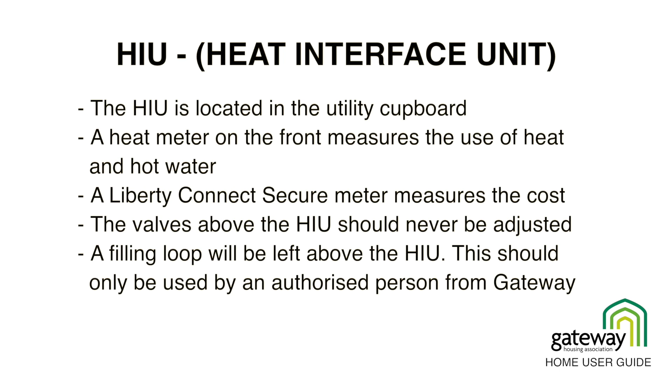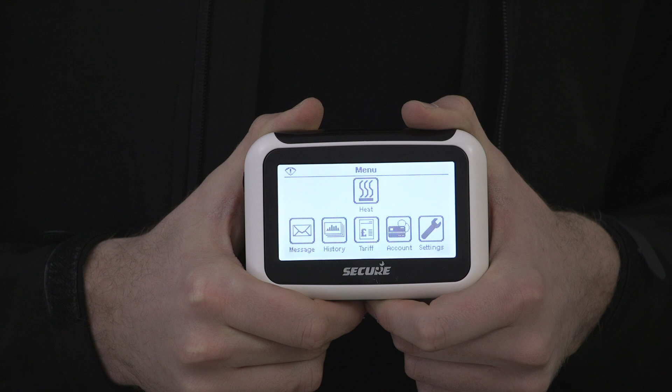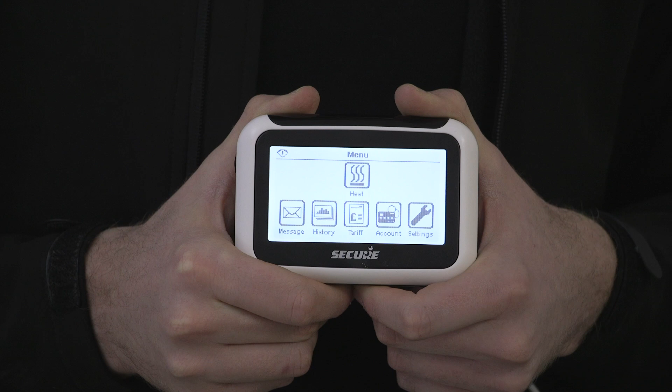This is your wireless heat meter, which is connected wirelessly to the heat meter within your cupboard. This is used to see how much hot water and how much heating you're using within your plot. Within this smart meter you can see your usage per month, and you can even see your previous history on months. This also shows your tariff and payments, and you can compare it to other months previously.

Usually you will not need to use this, it'll just be sitting on your worktop. There's more if you are interested to see your usage. For more information, please contact Gateway or see your home user guide.

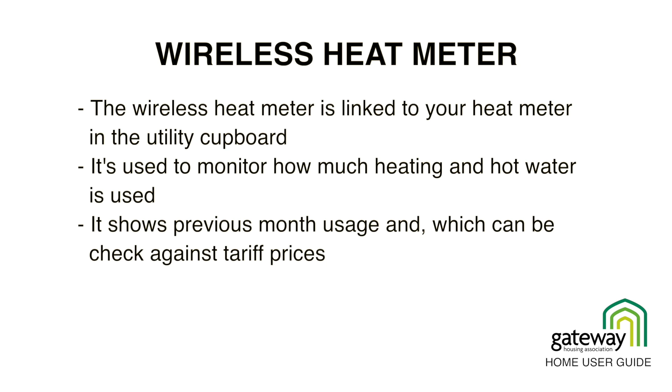Within the hallway there is also a programmer located, as shown here. This programmer is what the resident will use to turn on and off the heating within the plot. During commissioning, before handover, we've already set up the heating to be switched on at certain times for 2 hours in the morning and 2 hours in the evening.

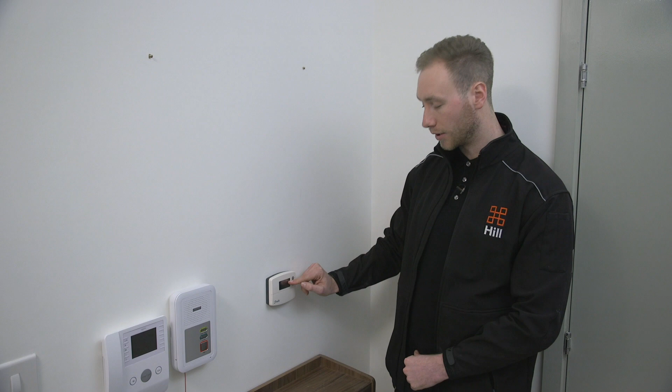The resident does have the ability to change the timings by opening up the lid at the bottom and following the simple instructions below. If the resident wants to raise the temperature within the plot, they simply click the up arrow key until the little fire symbol on the screen comes on, and that will mean the heating will be switched on. If there is no fire symbol, that means the plot has reached the temperature and the heating will switch off.

Again, if the resident is too hot within the plot, they just use the down arrow to lower the temperature. The programmer is also related to the TRV on top of each radiator.

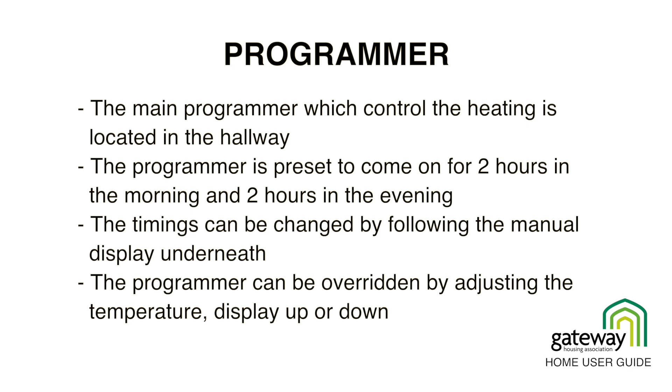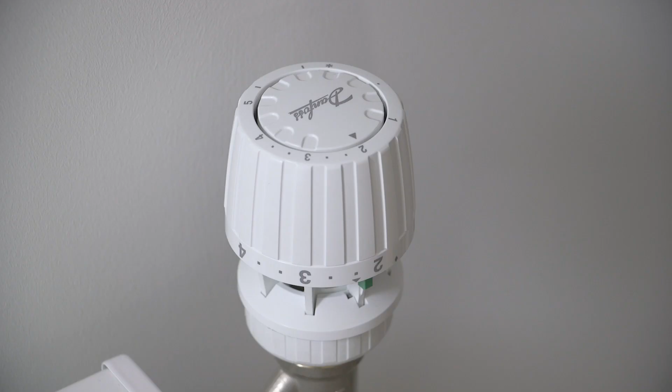In each plot you have a radiator such as this one within your lounge and your bedroom. We would have already set your thermostat up in the hallway, so your heating would come on, for example, at 8 to 10 o'clock in the morning at 20 degrees. Between 8 and 10, this radiator will start heating up to 20 degrees if the thermostat is set on 2, which is 20 degrees.

If you're not happy and you want the radiator to heat up further, then turn the thermostat round to either 3, 4 or 5, and that will make the radiator heat up further. If the radiator is too hot for you, then turn it all the way down to 1, which is the coolest it can be. If you want the radiator switched off completely, then turn the thermostat down to the single line.

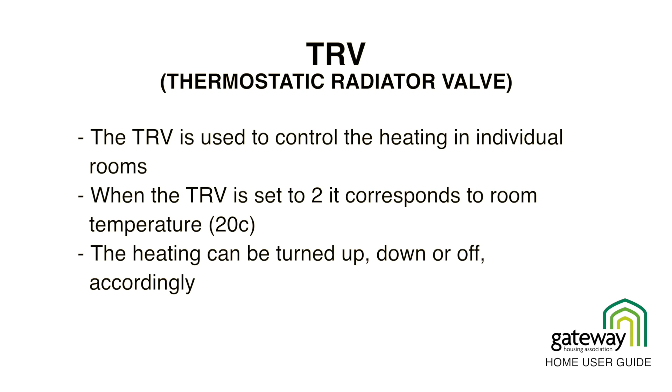Within your utility cupboard you'll have an MVHR, mechanical ventilation heat recovery system, which is this white unit here. This both supplies fresh air and extracts air around the plot, as well as recovers heat around the plot and recycles it. During our commissioning stage, we have already balanced the MVHR as per the requirements of the flat and the requirements set by the client.

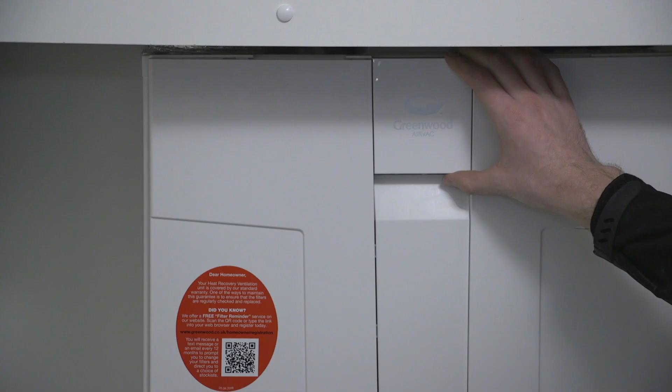There is a small display here. The resident never needs to look at this. This is to be looked at by maintenance people.

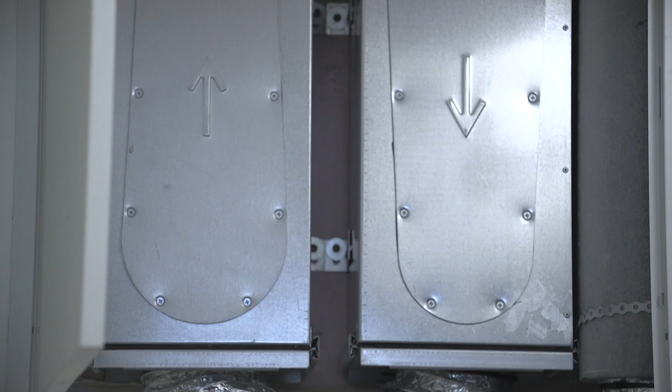Similarly, in the access panel above, there are filters to the system. Again, this should not be looked at by the resident, it should be looked at by a qualified member of staff. If there are any issues with the MVHR, the resident should contact Gateway, who should send out a qualified person to look at the MVHR system.

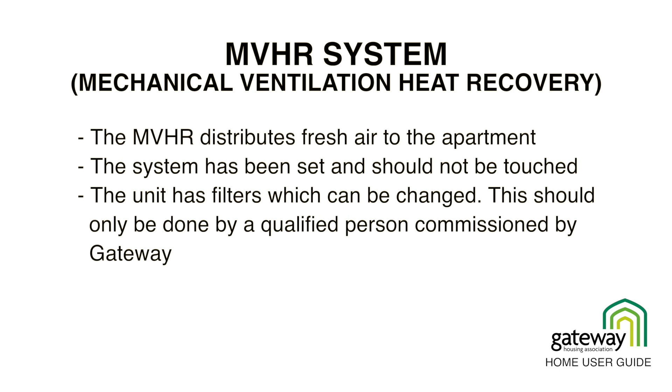As well as all the rooms having an intake or extract vent, the kitchen also has a fan boost switch. This will be used when you're cooking to get rid of smells or condensation. To switch the fan boost on, simply switch it down. You'll know the fan boost has come on because the fan will make more noise. Once the smells or condensation's gone, you switch the switch back up and the fan will go back into low mode.

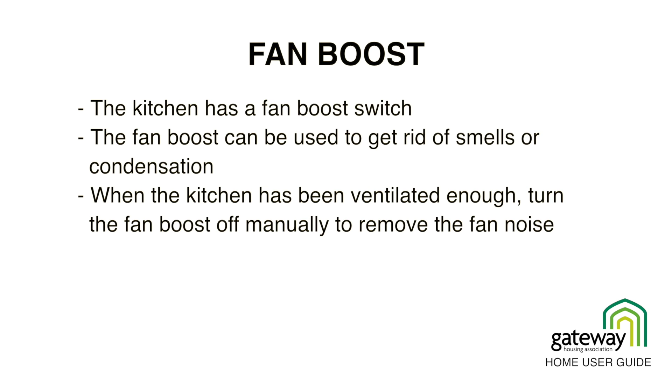Within your plot there are 5 sprinklers, one in the kitchen, lounge, bedroom, hallway and cupboard. You'll never need to worry about the sprinkler, and these will only be activated in case of a fire. In case of a fire, when the white cap reaches a certain temperature, it will fall off, the sprinkler head will fall down, and water will start to come out of the sprinkler.

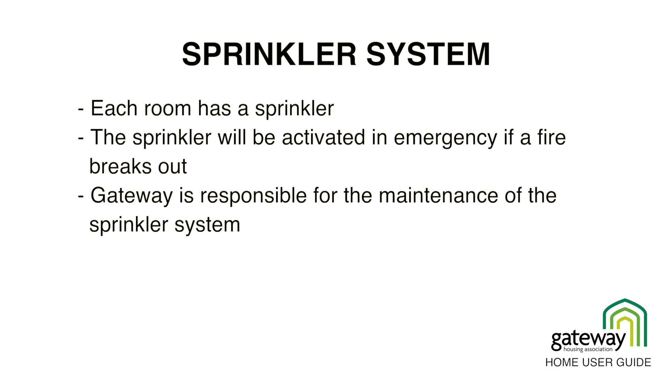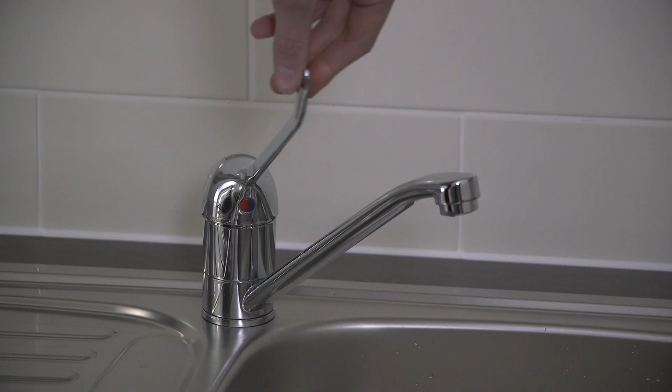This is the standard sink which is fitted in all the plots. To get cold water, turn the tap anti-clockwise and up. To get warm water, turn the tap clockwise and up. To turn off, simply turn the tap down.

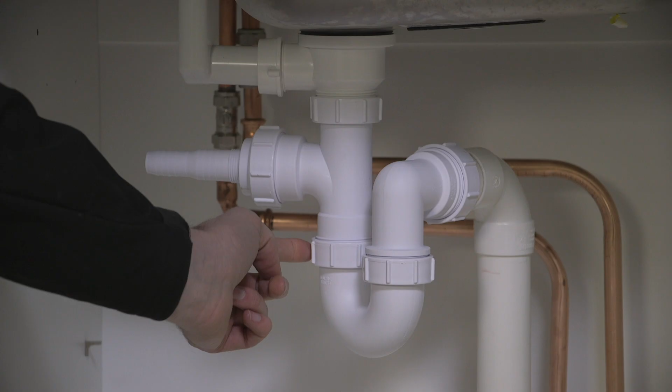Under the sink you have your waste kit. If there is a blockage, you unscrew this and you can get to the blockage, then tighten it back up once the blockage is removed. At the back you've got 2 copper pipes with your shutoff valves. In case there is a leak, you can turn the valves off and that will stop water coming out the tap. You also have a future use dishwasher waste if required.

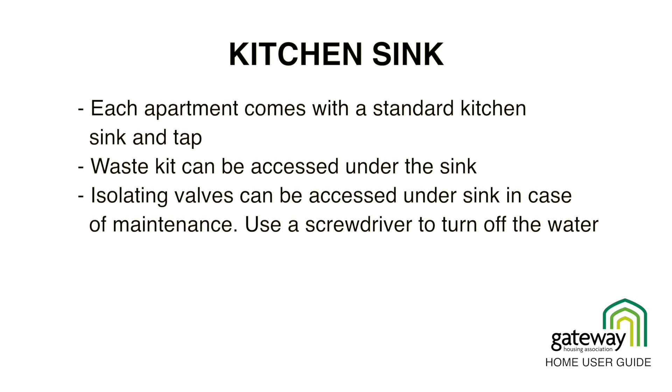Within each plot, there's at least one lockable unit within your kitchen. The key to the lock can be found within your key pack at handover. The cupboard is mostly used as a medicine cabinet, which can prevent residents and children getting into the medicine, but it also has many other functions if required.

Some of the plots are fitted with a tilt and turn window, such as this one. When you move into your plot, the window key will be kept in the handle and the handle will be locked. To unlock the window, turn the key, move the handle up and the window will tilt. To make the window open fully, make sure the window is fully shut, tilt the handle all the way up and the window will open. To lock the window, again shut the window, make sure it's fully shut, turn the handle all the way down and then relock the key.

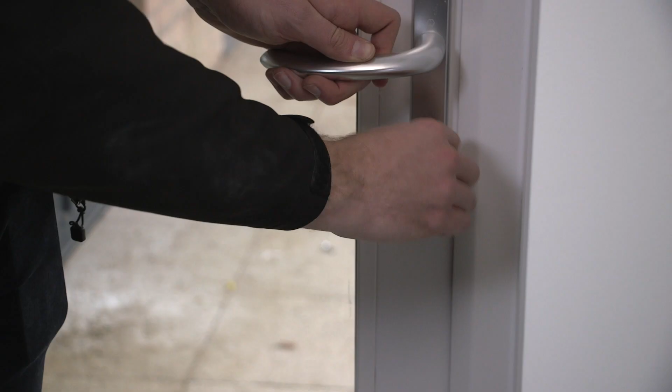Within your plot pack, you will have a lounge balcony door key and a bedroom balcony door key. This process will show you how to work both doors, as they're both the same. With the lounge balcony door, put the key in the door, turn the key, lower the handle, and the door will open. To close the door, make sure the door is fully shut, lift the handle up, and turn the key, and the door is closed.

All the front doors in this project are fire doors, and they can be locked in the following way. The resident simply lifts the handle up, turns the thumb turn clockwise, and this will lock the handle in place. For the resident to release the front door, they just turn the thumb turn anti-clockwise, pull the handle down, and this releases the front door.

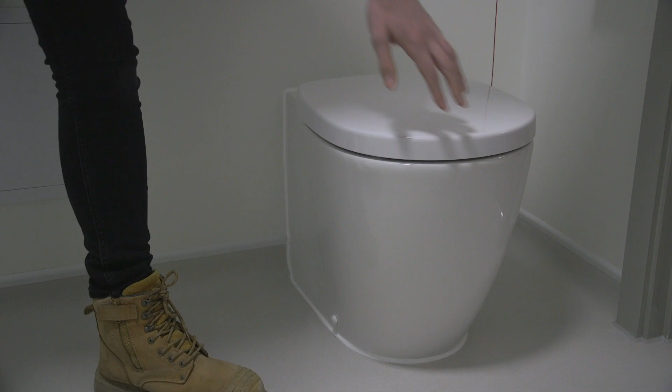Within the toilet is a back to the wall toilet and a flush button located on top. The flush button can be removed if there's any maintenance issues, however this will not need to be required by the resident. There's also a countertop sink which we have plumbed into the correct flow temperatures as per commissioning.

Underneath the sink there's an access panel. This is where the shutoff valves are for the sink if there is a leak, however this will mostly be used by maintenance staff only. Above the sink there's also an access panel. This allows maintenance teams to gain access to the SVP. The resident will never need to gain access to this access panel. This is only in case of a blockage, but again this will be undertaken by maintenance staff.

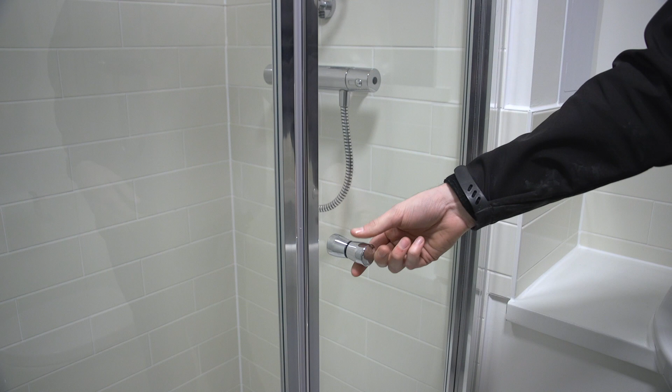In the bathroom you have a walk-in shower with a bifolding door. On the right hand side of the shower you have a hot and cold temperature control. On the left hand side you have your flow rates depending on how you want it. The shower is also handheld so it can be moved around the shower.

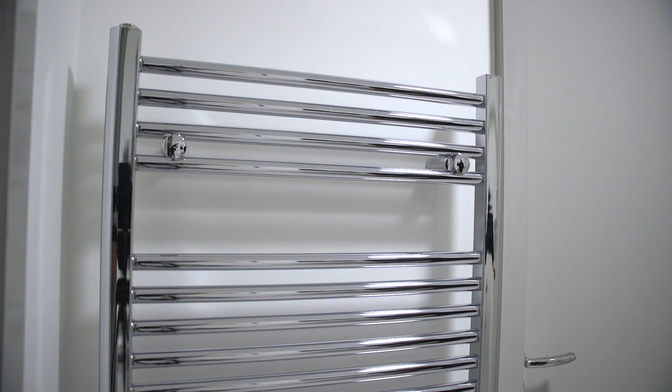On the ceiling, there is an extract vent. The extract vent is used when there is too much condensation in the bathroom. The extract vent will always be running, however within the MVHR there's a humidity stat, so when too much condensation arises within the bathroom, it will automatically kick into boost until the condensation level lowers, and then the MVHR will switch back to low mode.